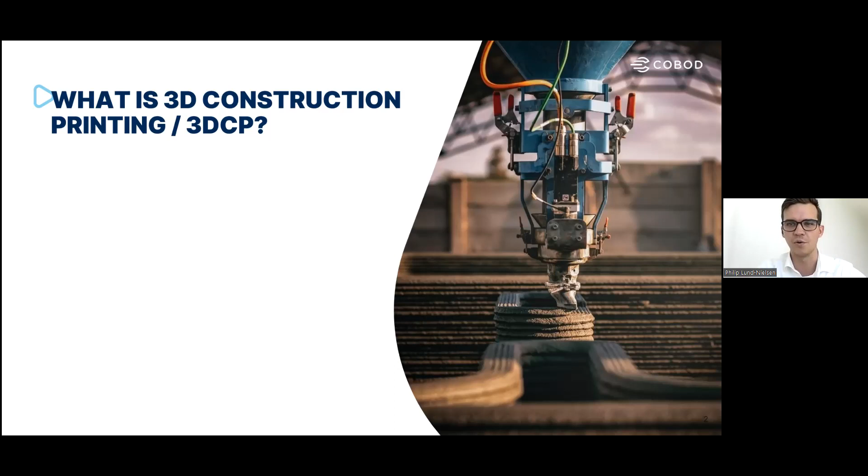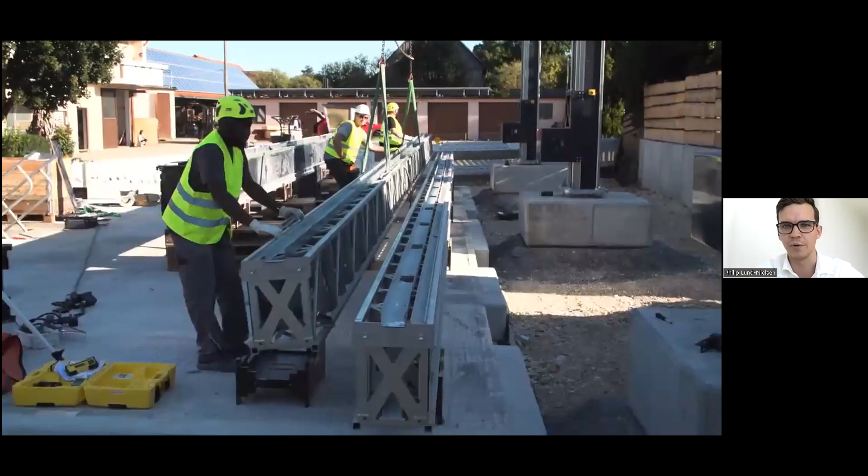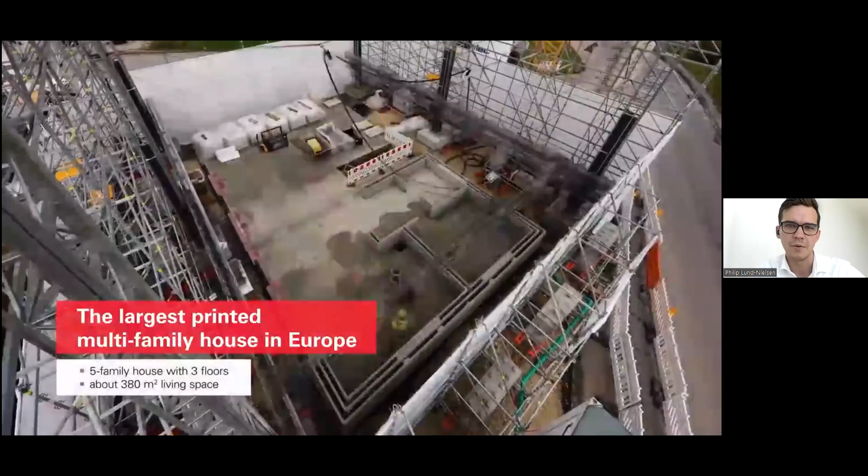3D printing in general is a way of automating the construction of buildings and other structures using concrete. You can see here the layers being extruded of this concrete, which will give you the final structure. Even better than a photo is a video, so let me go ahead and play a short video here. It might be a bit choppy since we're doing this online, but in essence this is a 3-story building that was 3D printed by our investor PERI Group in Germany. You can see these guys looking at the 3D file, which then comes to life using this machine extruding the concrete.

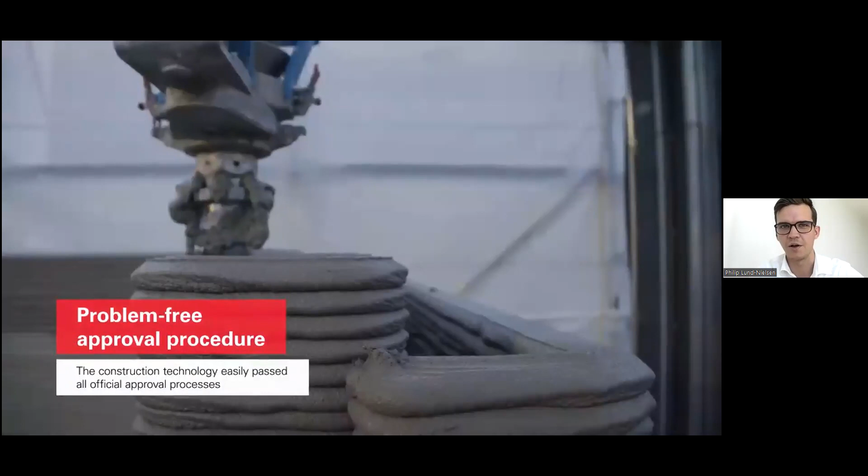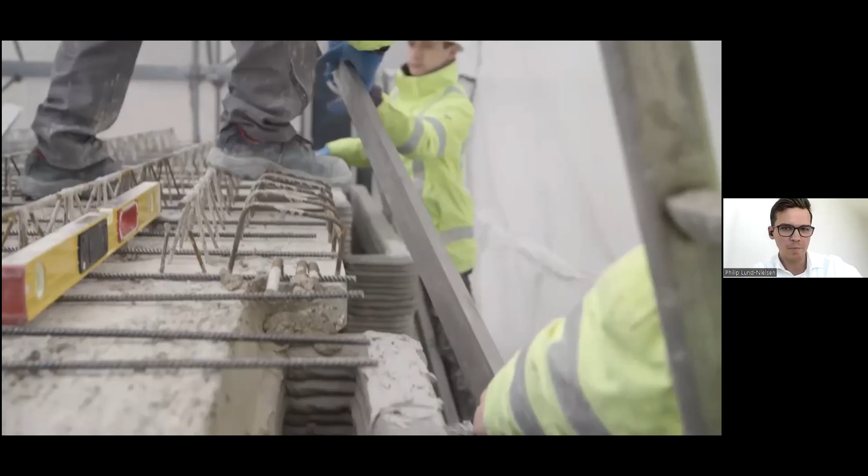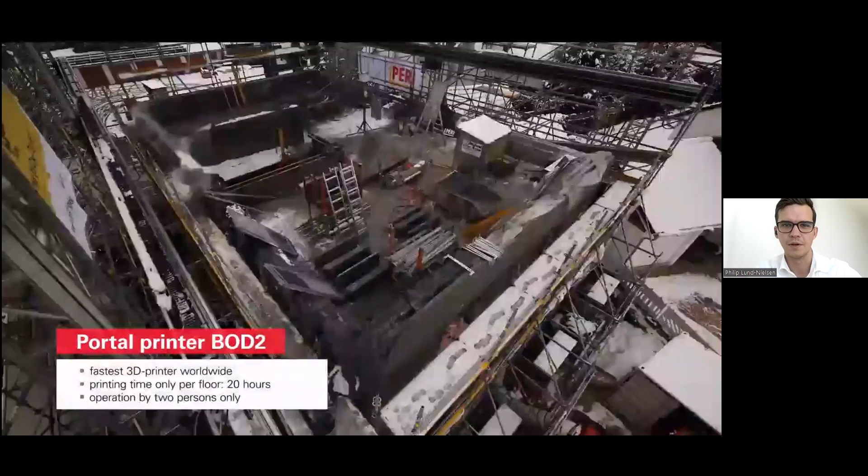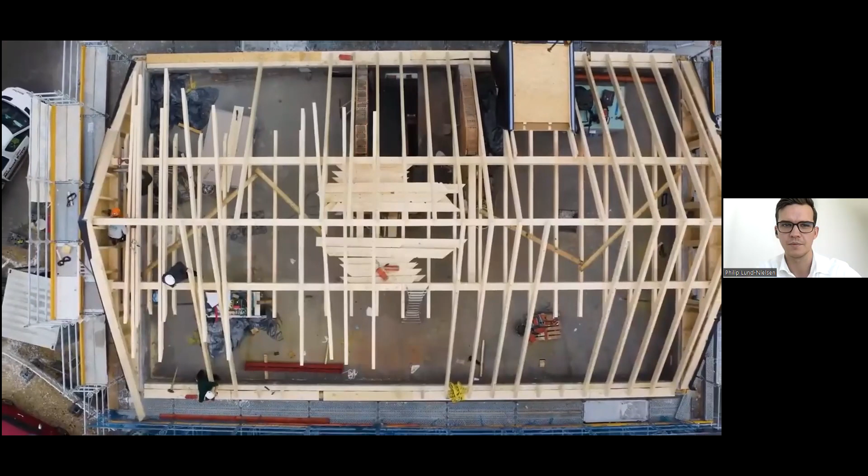This building here is around 4,000 square feet. You can see how the other contractors, through the electrician, come in and work in unison with the printer. This is the second story of the building. They're finishing up, the printer is finishing up, and then the third story. The roof is then put in via conventional method, by our investor and client PERI Group in Germany. So really a fantastic project.

After that, we can take the Q&A. So let me just jump right into a quick intro about COBOD.

We are the world's largest manufacturer of 3D printers for the construction industry. We have 3 regional offices. Myself, I'm from Copenhagen, Denmark. We have our offices in Miami, Florida - I just flew in yesterday, actually, so that's where I live with my team. We opened an office in Malaysia last year to cover Asia Pacific, and we plan to open an office in Dubai in the coming year to cover the Middle East and Africa. We've had almost 100 employees, so we're growing quite rapidly.

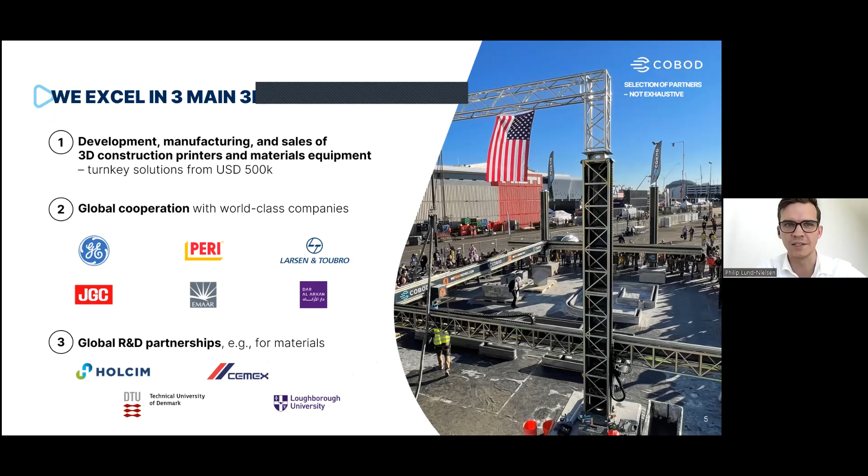Moving on, COBOD does 3 things in general. Number 1, we develop, manufacture, and sell these 3D construction printers worldwide, starting from around $500,000 per system, such as the one you see there to the right, which was in Las Vegas last year. Now, we're not a construction company ourselves, so we sell the technology and our clients actually do all the projects. We only supply the printers, not the project execution.

Secondly, we cooperate with these companies in bringing these projects to life, so there's a lot of support around actually getting these projects executed. We do that with, for instance, GE, PERI Group, Larsen & Toubro, which is India's 7th largest company, et cetera. And lastly, there's a lot of R&D that we do, both within materials and within the design and structure of 3D construction printing, which is somewhat different from conventional building. We do this with the largest cement and concrete companies in the world, such as Holcim and Cemex, and also a lot with universities.

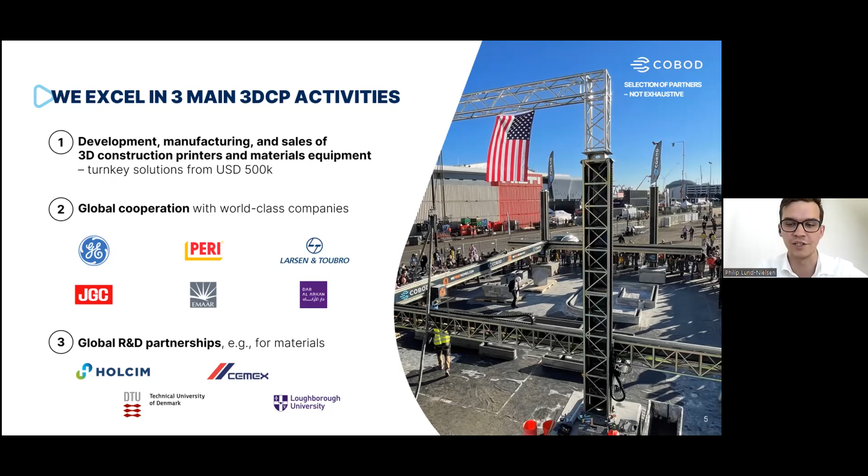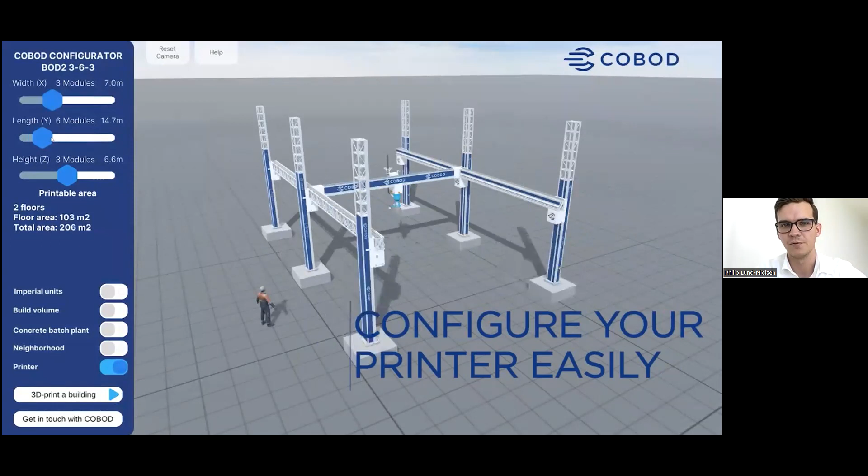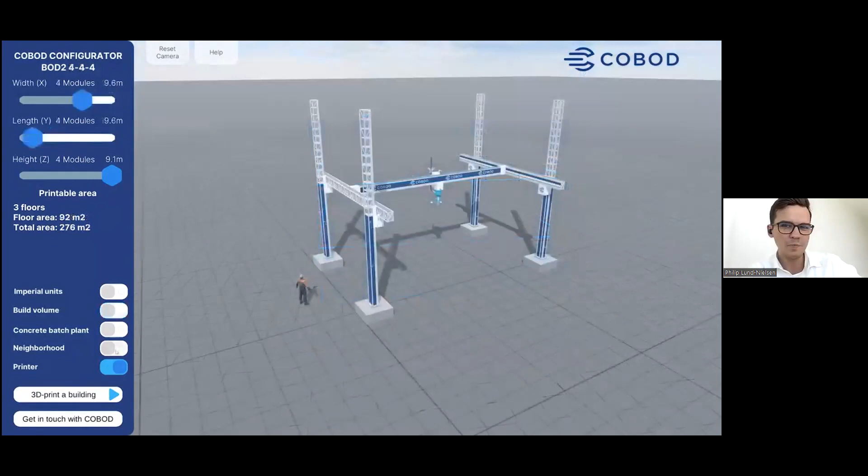We can also simulate projects that our clients have done, which means we can take a project from the digital world, as you see here, to the physical world that you can actually live in. And if you thought this looked cool or want to try it out, you can go to our website and play around with this. It's a lot of fun.

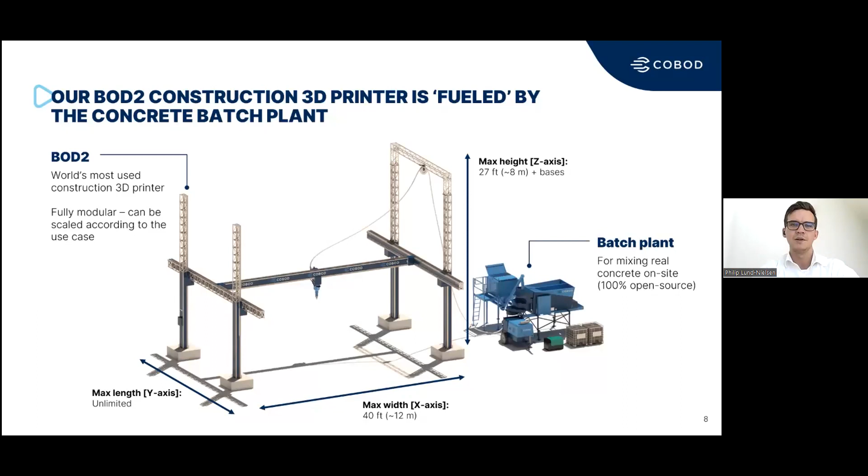From anything, from when we 3D printed the first home in Europe in 2017, a small 500 square feet home, to 2-story buildings, 3-story buildings, schools in Africa, buildings in the US, office buildings, urban furniture, and I could go on. There are a lot of different use cases for this technology, and it's only growing.

So we saw a lot happening in 2022. I need to actually update this list, and we will see even more so in 2023 moving forward.

If we deep dive on a few of them, we can start off here with a home that's now almost 4 years old. It was done in Belgium, 1,000 square feet, done in 2 floors and 3D printed in just 21 days, which for a first project is quite decent, especially given it was in 2019.

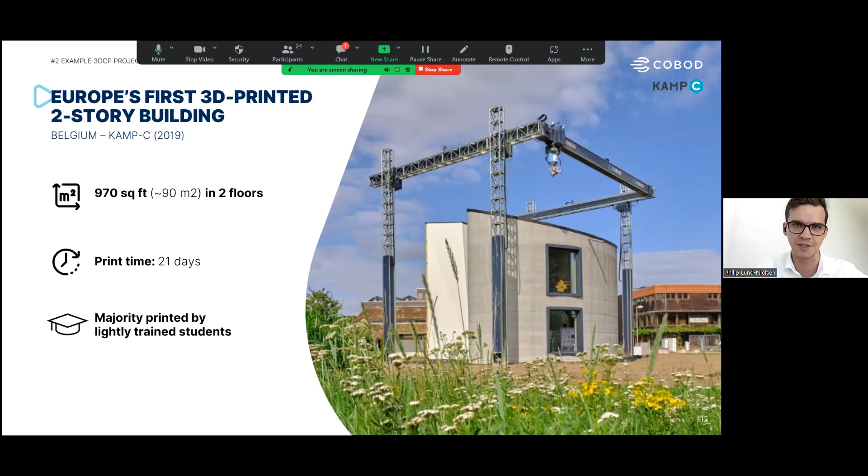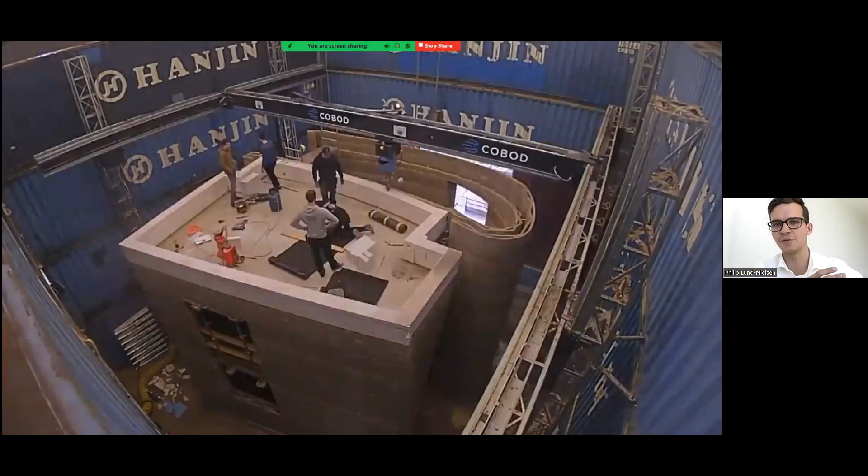Let's just have a look at how that looked. You can see here the machine does more or less all the work related to the raw house structure. Then afterwards, once the machine is done, you have the other contractors come in and finish the non-3D printed parts, such as the windows, the roof, the floors, kitchen, et cetera.

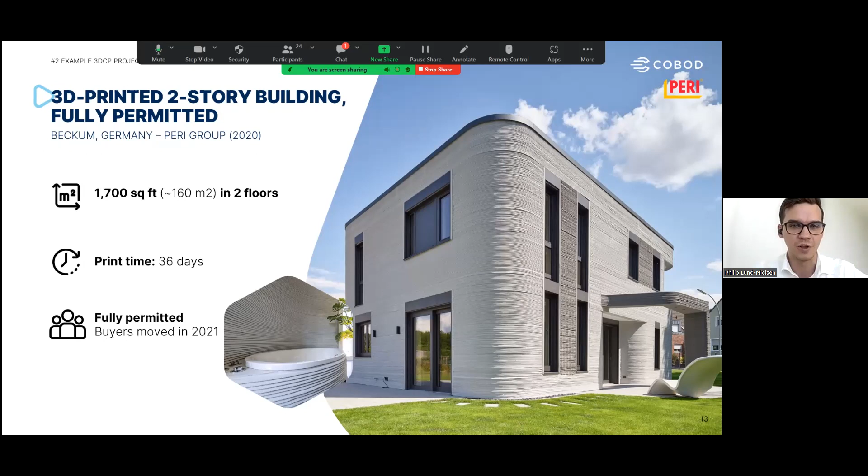We've also seen kitchen islands being 3D printed. And the cool thing is you actually have a family living in this building. It's not just a demo unit, and this applies to a lot of these buildings that you'll see here in my presentation today.

I see we have some comments in the chat. Fascinated, the design is amazing. I want this. Thanks a lot, guys.

If we move on, I had to show you one also from my home country of Denmark. This was a student housing unit with fancy Scandinavian design, 1.5 floors, and it took them around a month to print. They now plan to do an additional 20 of these for the local students in that small town of Denmark. So that's quite neat as well.

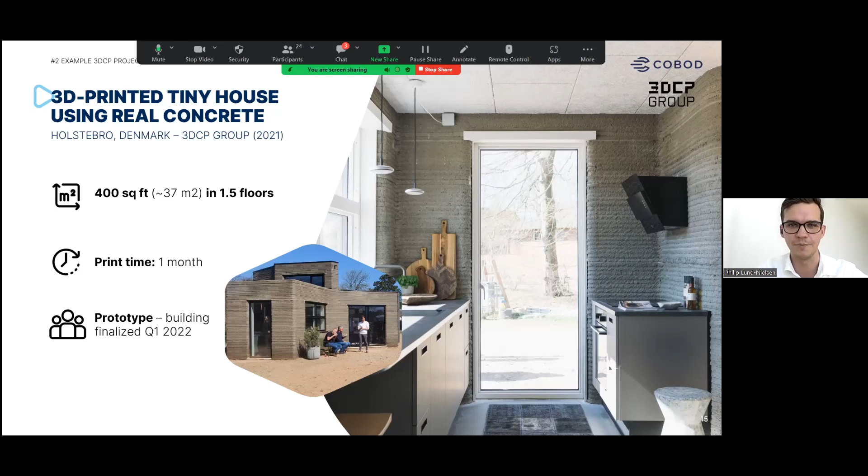Here's one a bit closer to us. This one is in Ontario, Canada, and that's the world's largest building that was 3D printed using real concrete, 2,300 square feet. In Canada, it's a multiplex with 4 units, I believe.

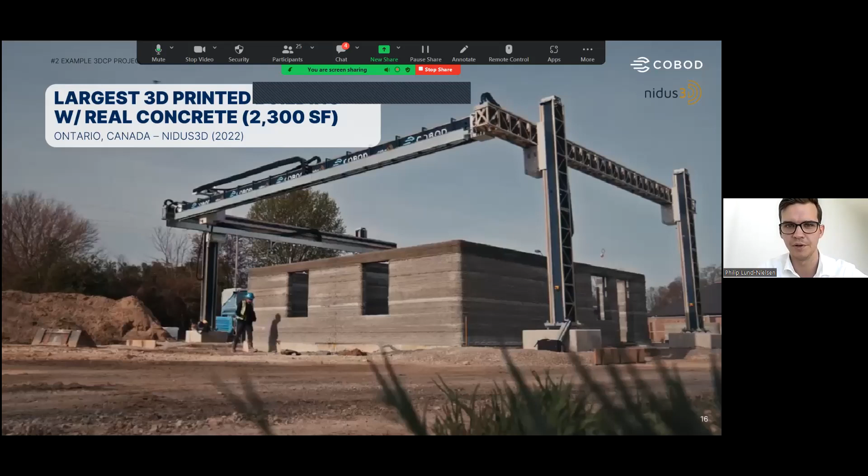And then another one that we're very proud of, also by our client PERI, a 2-story building in Houston, the first 2-story building 3D printed in the States, and it's going to be larger than 4,000 square feet. And they did a short video, so let's just have a look.

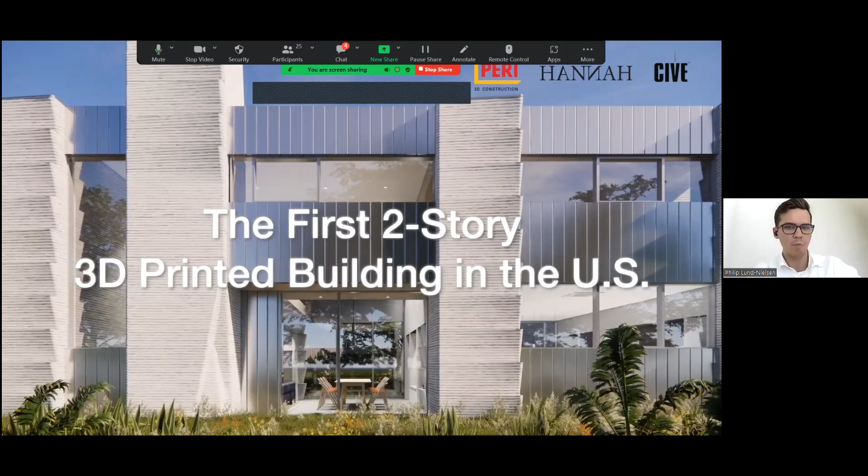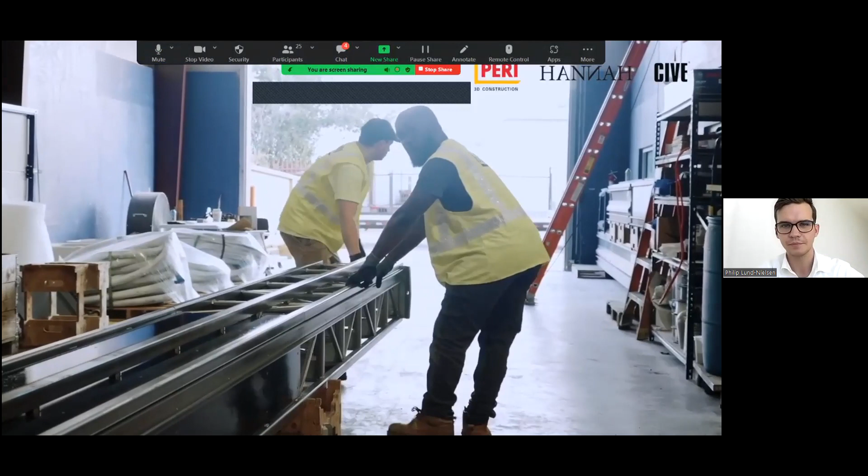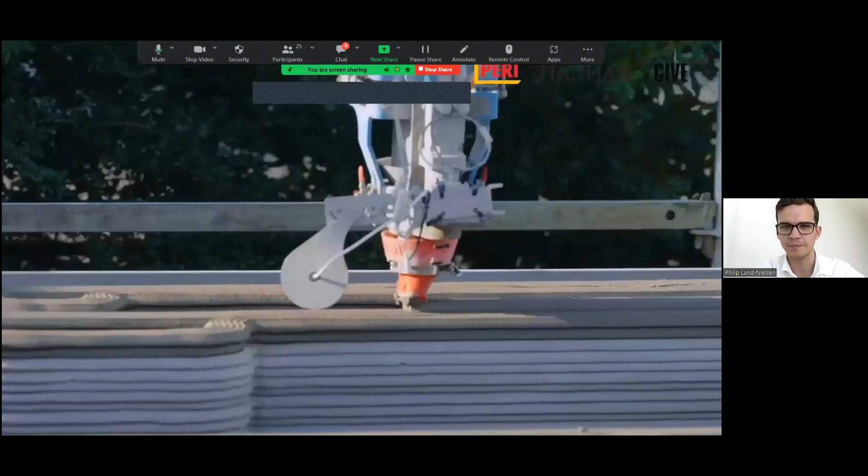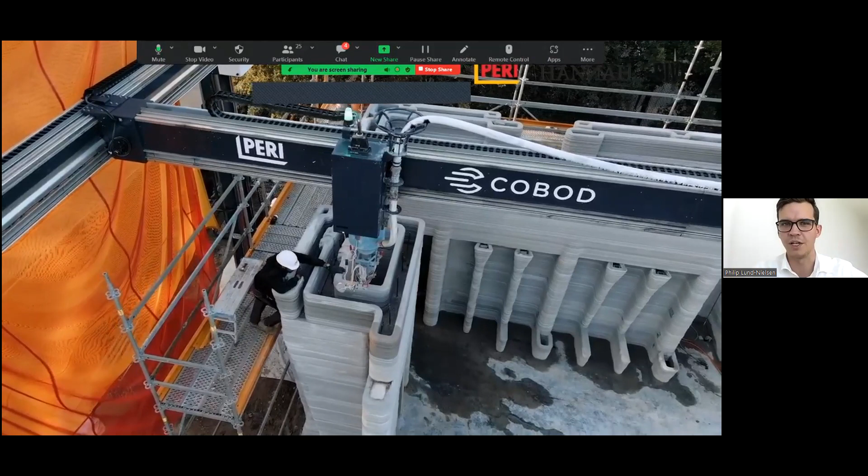And installing the printer, which is also a good sized piece of equipment. The concrete gets extruded. And you can see here how the technology really allows for doing designs that would otherwise be way too complex and too costly to do with conventional construction methods.

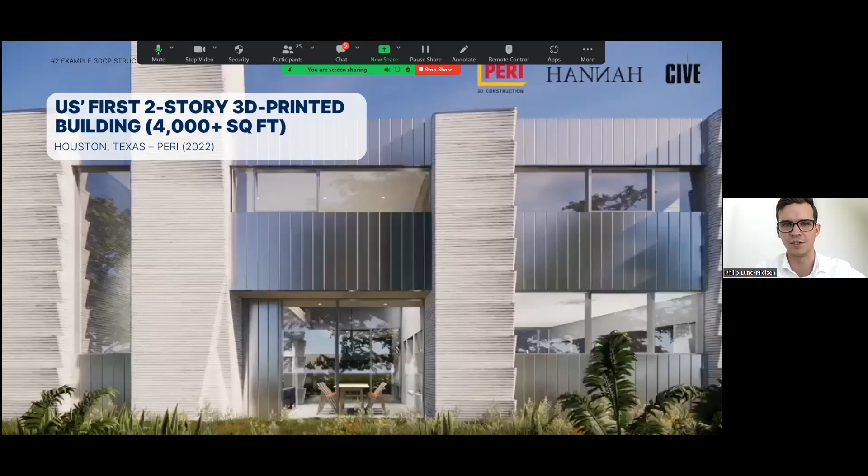And these are the partners that are involved in this project by PERI Group. Quite nice use of the technology, and really once they're done in a few months with the 3D printing, I think it's going to be one of those historical moments almost of this technology.

You can also use it for other types of structures. So here we have some urban furniture 3D printed by our client in Guatemala called Progreso. It's a bench for, I think, a bus stop, and it just looks really neat with the combination of the light here and the concrete.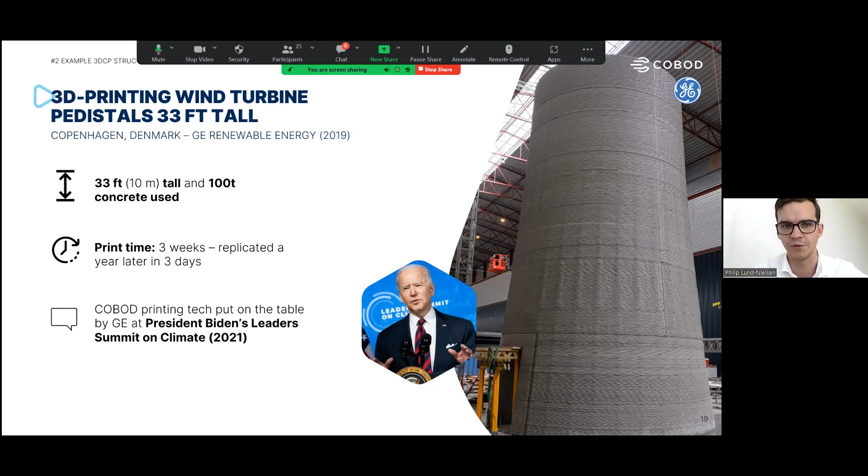I'm just going to skip the video here due to time considerations. So those were some example 3D printed structures, and I hope that gave you an idea as to how this technology can be used to do construction in new ways.

Besides it just looking awesome, I also wanted to talk about the benefits of this new technology. We see 4 main benefits of 3D construction printing: number 1 is automation, number 2 is speed, number 3 is material efficiency or sustainability, and number 4 is added design freedom. Today I want to deep dive on numbers 1, 2, and 3.

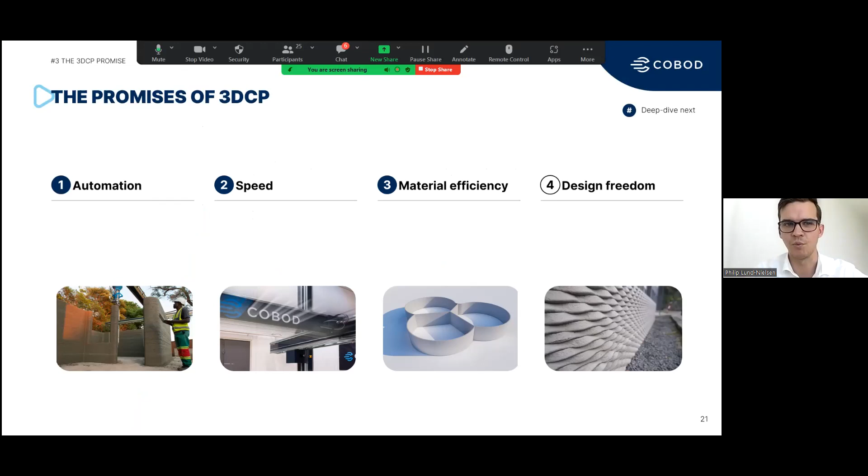Starting with automation: in essence, you reduce labor cost by having less labor on site, which is especially hard to get these days due to a lack of skilled labor. In addition, you increase quality, precision, and safety by having the machine do the work. So let's talk a bit more about automation.

If we look at the US housing market right now, you're all aware it's not looking too bright. There's around a 4 million home housing shortage in the States. Housing prices have increased drastically post-COVID, 30 to 40% by the records I could find, and the average construction time has almost doubled, from 4 to 6 months to 8 months plus post-COVID.

That's why we want to introduce this technology, to really address these issues. Automation is truly needed in construction and the housing market. Construction is the world's largest industry, yet it's one of the least automated industries as well.

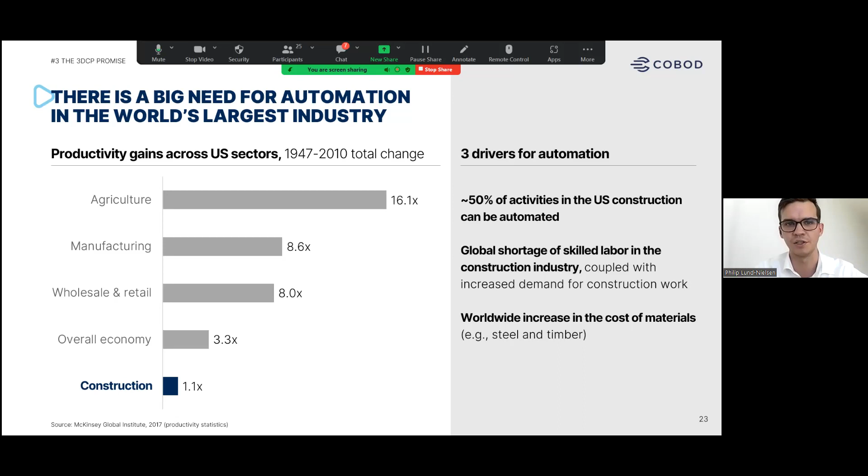While we haven't looked into those numbers ourselves, we've started to hear anecdotes that costs are actually coming down, and I see this only improving in the future. Remember, we only sold the first machine in 2019 — imagine where we'll be 10 years from now. It's really looking bright moving forward.

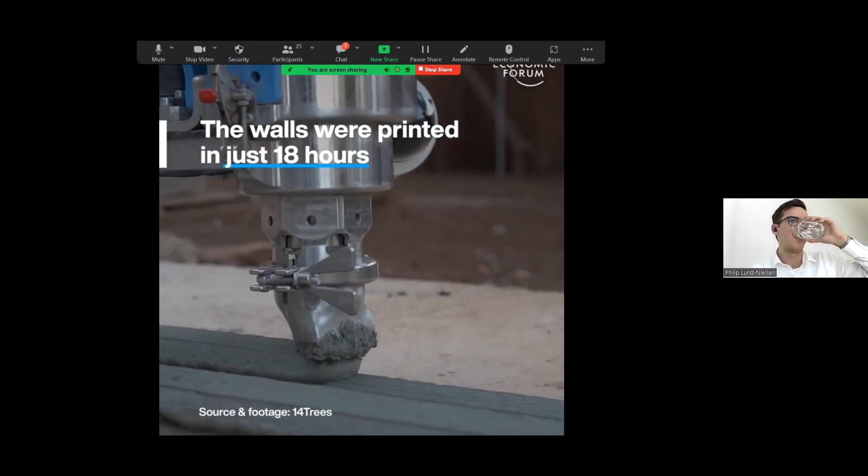Another example of reduced cost is this 3D printed school done in Malawi, Africa, by our investor Holcim. It was covered by the World Economic Forum. They claimed a 50% smaller carbon footprint, and they 3D printed it in only 18 hours, with both an indoor and outdoor classroom.

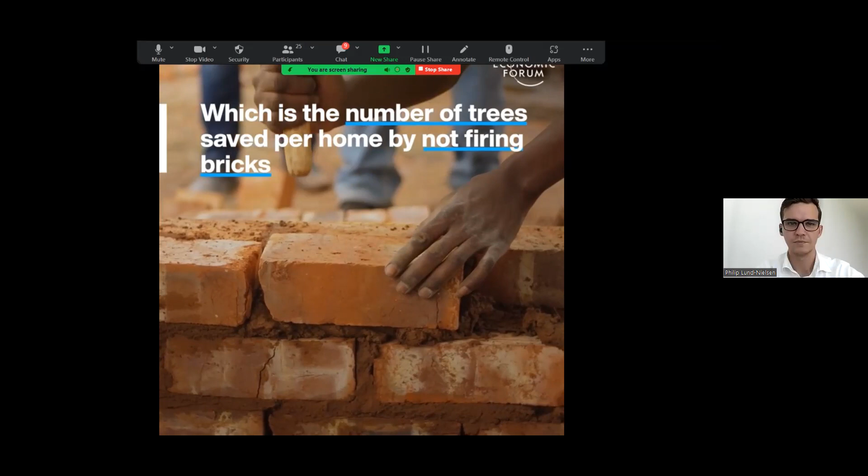They've now started a very large-scale project with 50 homes in Kenya, Africa as well. So we're going to see more and more of these projects popping up.

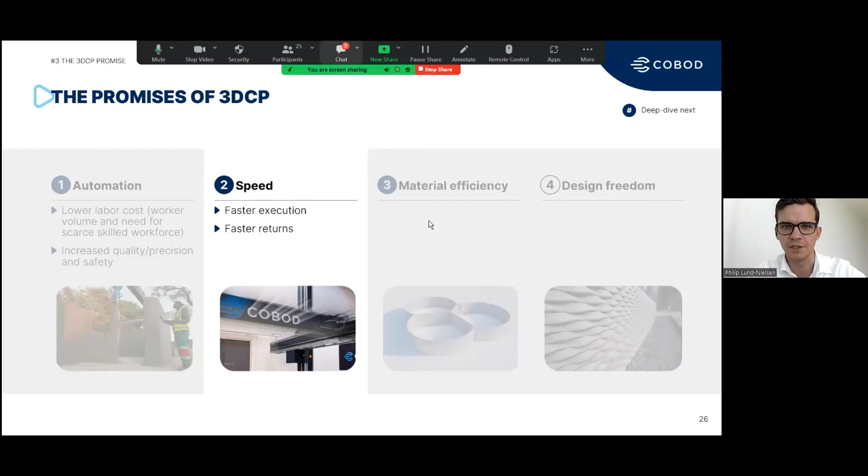Let me just check the chat here to see if there are any questions. We have a lot of questions, Philip. I was actually going to wait until the end to go through the questions, unless you want to stop right now and answer them.

Let's take it at the Q&A, and then if there are any follow-ups, I can take them right away. Okay, because Della and I are collecting them, so just to make sure we get them all. Cool, sure. Okay, thanks. You want me to start, Dawn?

So one of the questions was, are these types of structures approved in all 50 states? I know you're on the manufacturing end instead of the building end, but do you know if they have structural approval? Actually, if it suits you guys, let's do the questions at the end, at the Q&A, and I'd be happy to speak more about permitting and all the rest. That's good, okay awesome. But we can for sure speak to that.

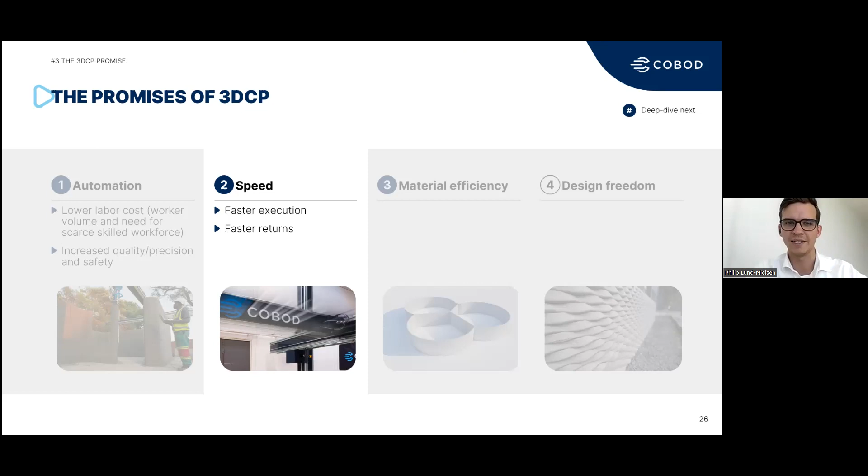So the second benefit of 3D construction printing is speed, being able to do homes faster. Faster execution means faster, bigger returns. As an example, we have one here of COBOD doing the same 3D printed building twice.

We built the first 3D printed building in Europe back in 2017, around 500 square feet, and it took 2 months to print. For 3D printing a new building, this had never been done before on that continent, so we thought that was fairly okay. But 2 years later, we replicated the same building using the same 3D file, and we went from 2 months down to just 3 days. That's a productivity improvement of a factor of 20.

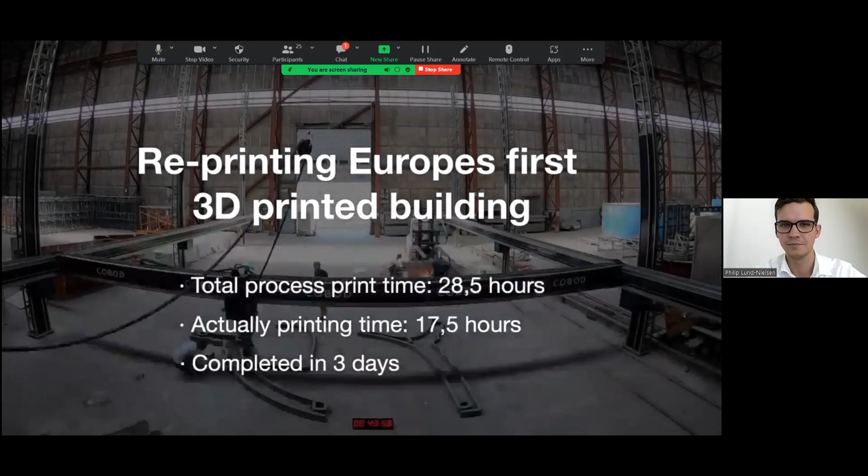You can have a look here how it looked the second time we did it. Everything is documented - that's why we had the clock there in the front, because we want to be very transparent about the claims that we make.

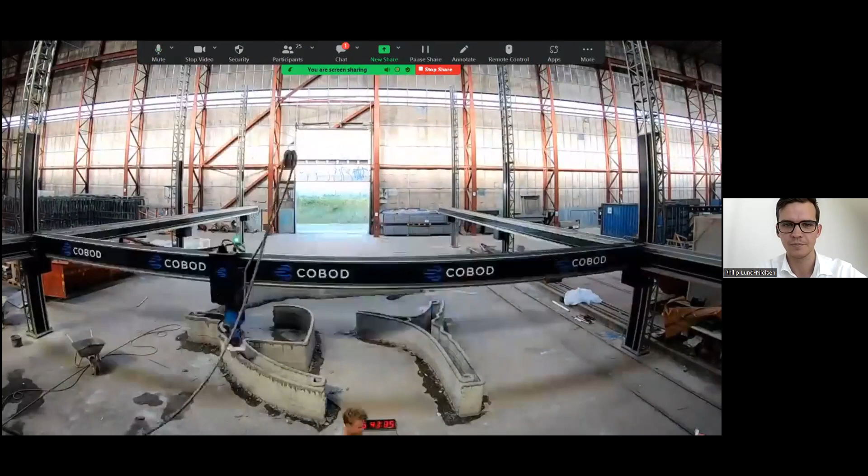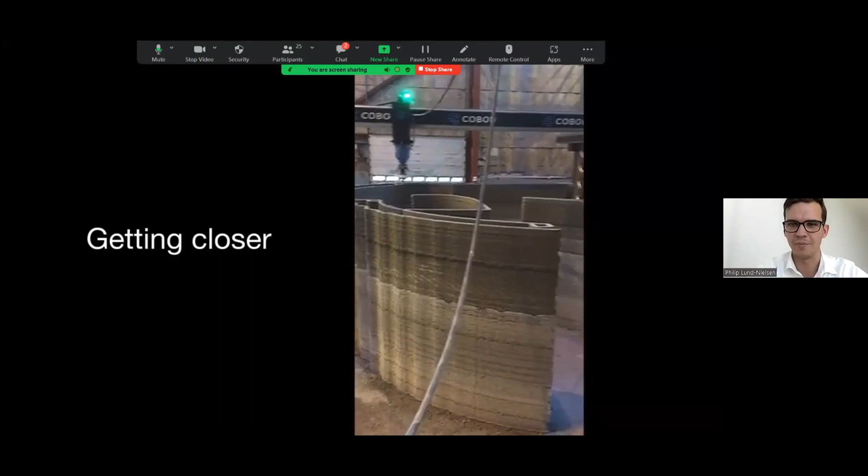In this video you can also see over how many days the building was 3D printed. A telltale of that is the color changes - the bottom half has a lighter color, which is the first day where the concrete is cured, and on top that's the fresh concrete being extruded there in the back.

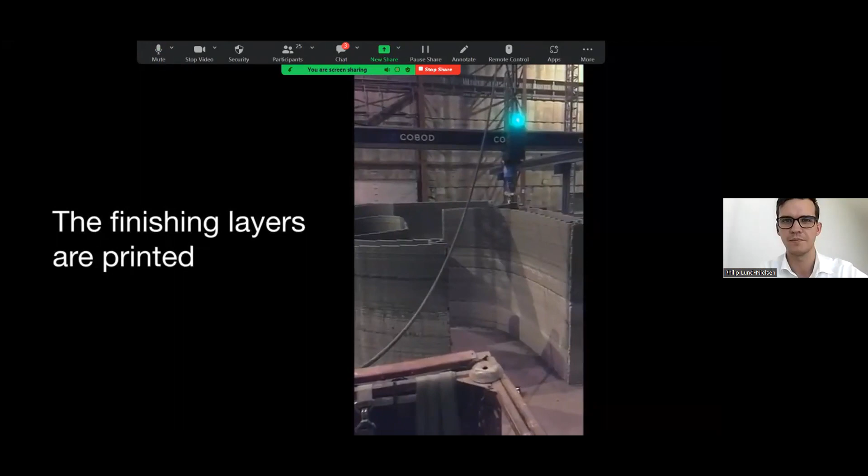Here from the top, with some more stats - this was a productivity improvement of around 20x. We see this all the time with our clients, that the learning curve is so steep that from the first project to the second to the third, they improve drastically, both with regards to speed and material waste, which gets reduced by a lot. It looks better too. I think in 5 to 10 years, this will be a major competitive technology to conventional methods, and it already is today by the anecdotes we hear - it'll only improve from here.

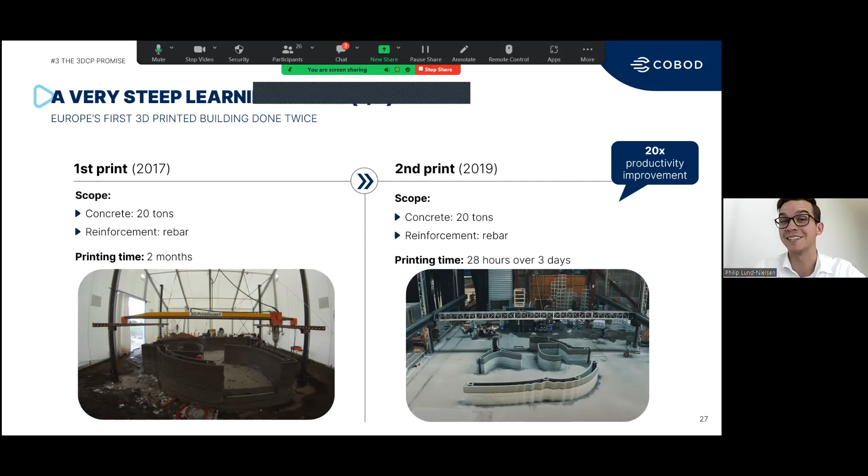It's really fascinating to see what our partners accomplish using 3D print technology. So speed was benefit number 2. The last benefit I wanted to talk about was material efficiency - reducing waste by only 3D printing what you need, and secondly, having the possibility to use new and greener kinds of materials.

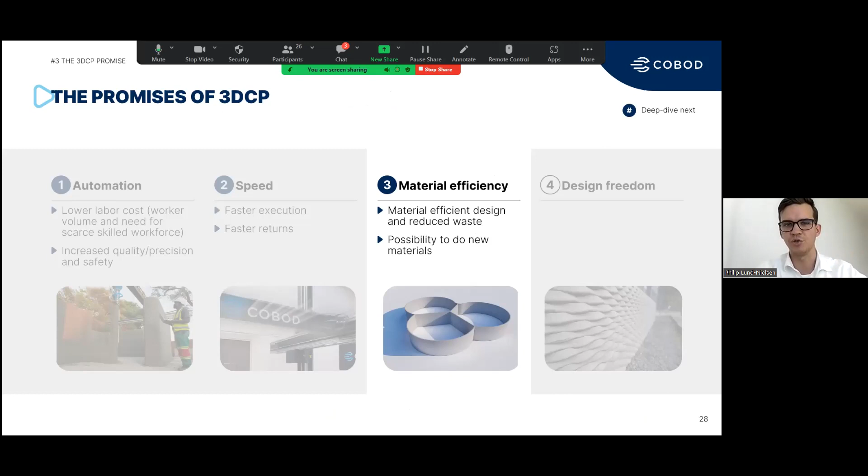One thing I find particularly fascinating is reducing the amount of material used by optimizing the structure. As an example, we have 2 classroom designs our client wanted renderings of. One is a modern design with 3 rounded classrooms, which is unconventional compared to the bottom one, which is exactly conventional - 3 rectangles next to each other, a room we've all been in before.

If you look at the stats, the floor area is the same across the 2 designs, 2,200 square feet. But the material usage of the modern design is actually 10% less, simply because a rounded shape is more efficient than a rectangle. So that's 10% less material just by doing a different design.

In addition, I find the modern design more aesthetically pleasing, and honestly it's better suited for learning because of acoustics. Everybody faces the teacher at the middle of the room, similar to an old Greek auditorium or theater, where people would face inwards with the actors at the bottom.

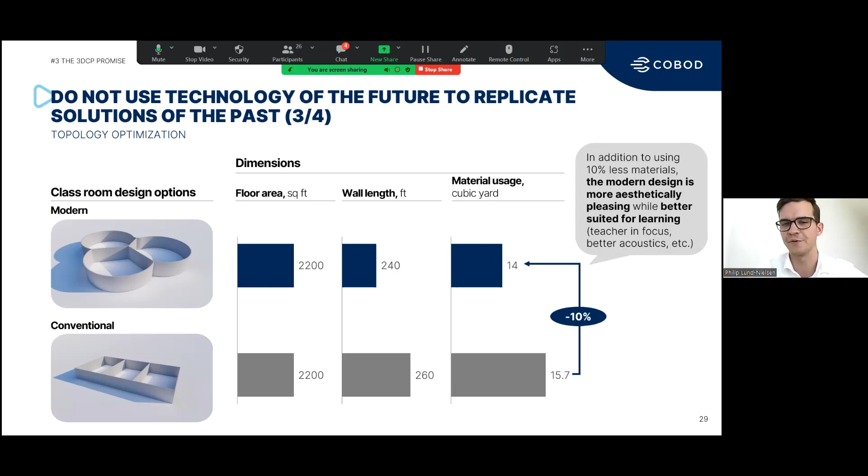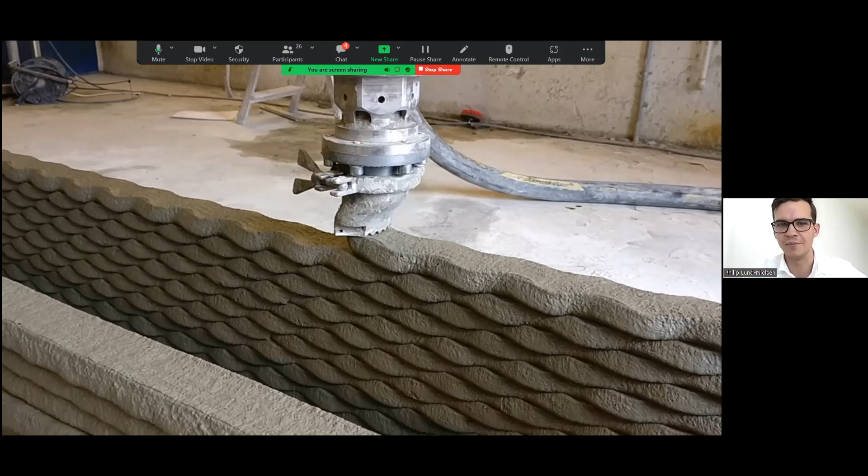Lastly, I said I wouldn't talk about it, but just a bonus round here. The design freedom you get from 3D construction printing is out of this world. It allows you to do designs that you would have otherwise never done, such as the 3D printed wave pattern you have here. Or you could even do a logo where you imprint, in this case, the COBOD logo right into the walls themselves, which would be at the same cost as doing these walls in a straight line.

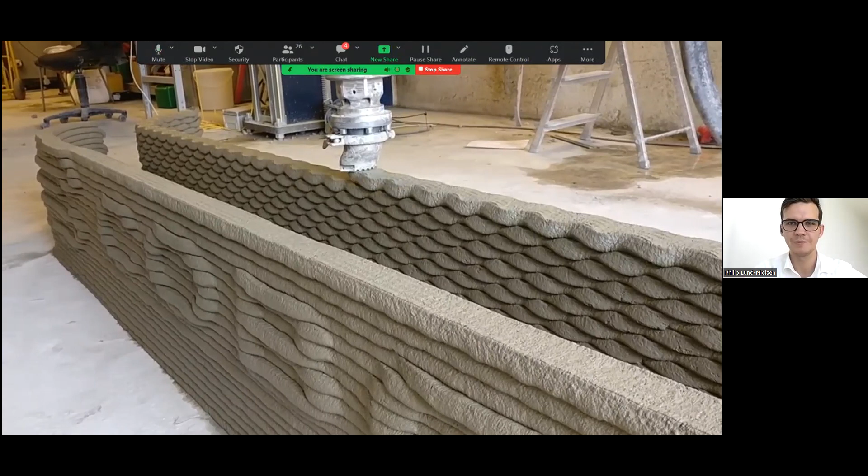Let's just have a look one more time. Really, really pleasing to the eye. So those are the 4 benefits that we see of 3D construction printing: automation, speed, material efficiency or sustainability, and 4, design freedom.

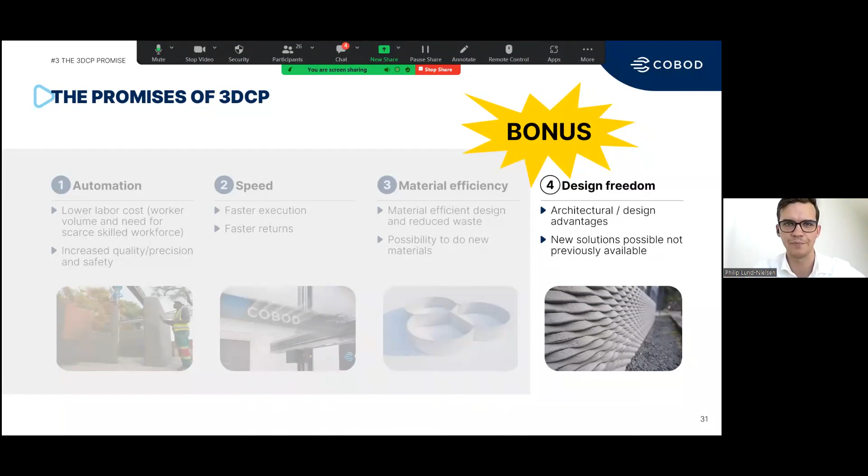Here, I wanted to talk about what are some steps of a 3D construction print project. I will not go through all of them, but just give you a high-level introduction and answer some of the most common questions we get within this area.

High level, you would need around 4 people on the 3D construction site. First, you have a print operator, that person is all the way at the top, overlooking the print area. Secondly, you would have a materials expert standing next to the concrete batch plant, which you see there in the middle, outlined in blue.

Third, you would have a materials helper. This person is refilling concrete, or the components of concrete—sand, cement, and gravel—into the silos, which is then mixed together to create concrete on site. And fourthly, you might have a visual inspector or helper simply to walk around and ensure the walls are coming out as intended in the 3D file.

So this is a typical overview, and you would reach around 3 or 4 on site within a few projects. Initially, you might need a few more as you get accustomed to the tech.

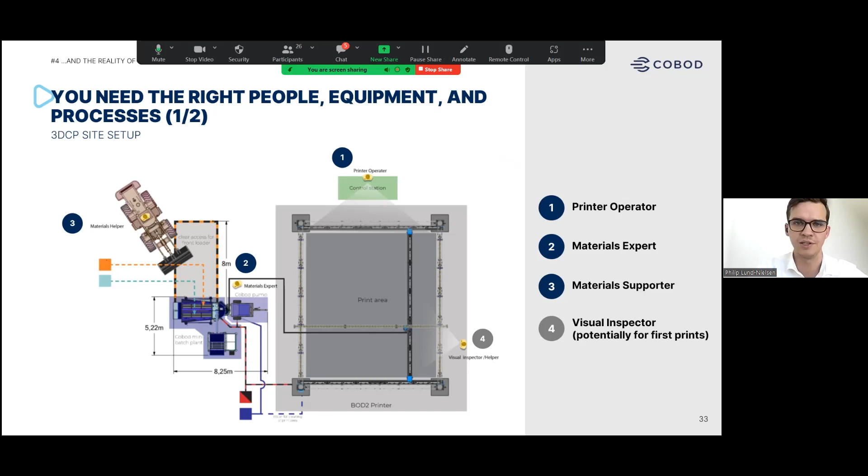We see 7 main steps of a 3D construction site. You have 3 groups: the initial manual work, 3D printing, and finishing. So step 1 is excavating the ground. Step 2, installing the BOD2 3D printer.

Then the fun starts with step 3, which is printing the top foundation of the slab. Then step 4, printing the walls. Step 5, completing any horizontal work. This could, for instance, be 3D printing the roof or 3D printing the slabs for each floor.

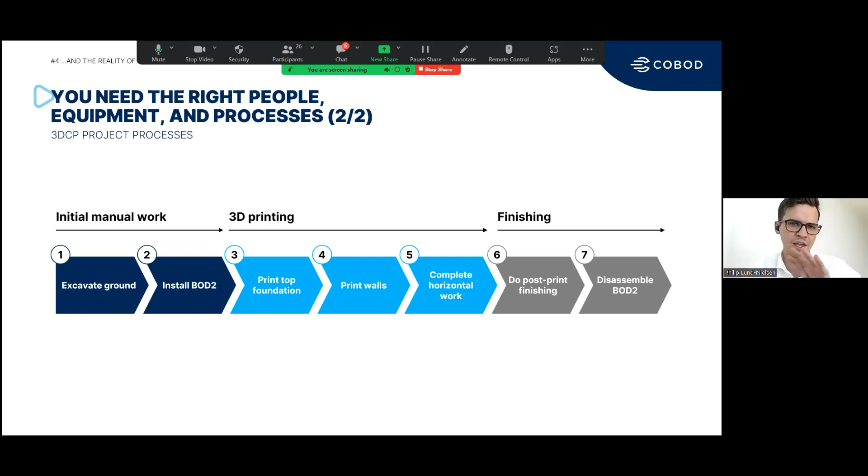And then lastly, finishing, step 6, post-print finishing. It might be that you want to trowel the walls to do smooth walls, adding insulation, MEP in general, and then disassembling the BOD2 and moving it to the next construction site. If we just deep dive here on the middle part of the 3D printing process—

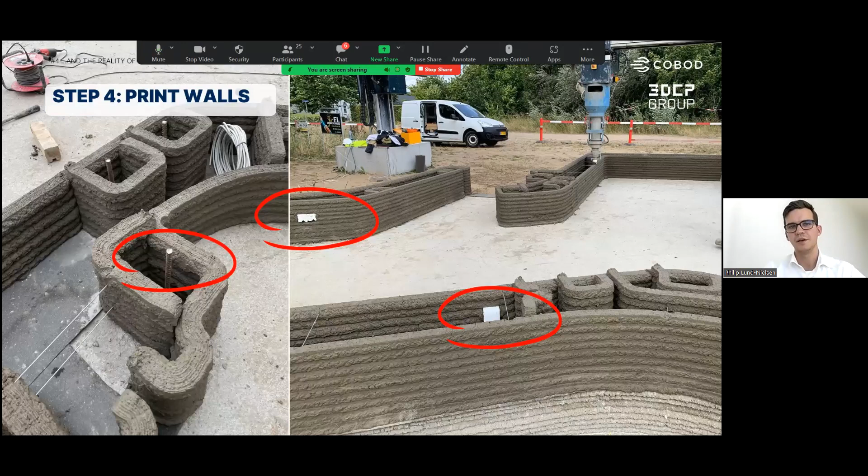The question we get often is how we do reinforcement, and this is also related to the permitting question we had before. If you look to the left, what we do is around the interior or exterior walls, we 3D print these columns. Once the columns are finished, you stick down the rebar, the steel, and then backfill with regular concrete. Those become your load-bearing elements of the structure. So typically that's how you get the permitting done, not through the 3D printed walls—they're more, you could say, ornamental, despite being very, very strong. What really gets permitted are those columns with regular concrete, backfilled and reinforced with steel here.

To the right, you can see how electrical sockets are done.

When you do the print, you simply stick in styrofoam cups or other types of cups that the printer then prints right on top of. Once the concrete is cured, you can pull them out, and the electrician can come in and run the conduit and everything else. This makes it easier for other contractors to do their work. You can see how an electrician can come in and run the conduit at knee height, which might be more difficult with conventional construction methods.

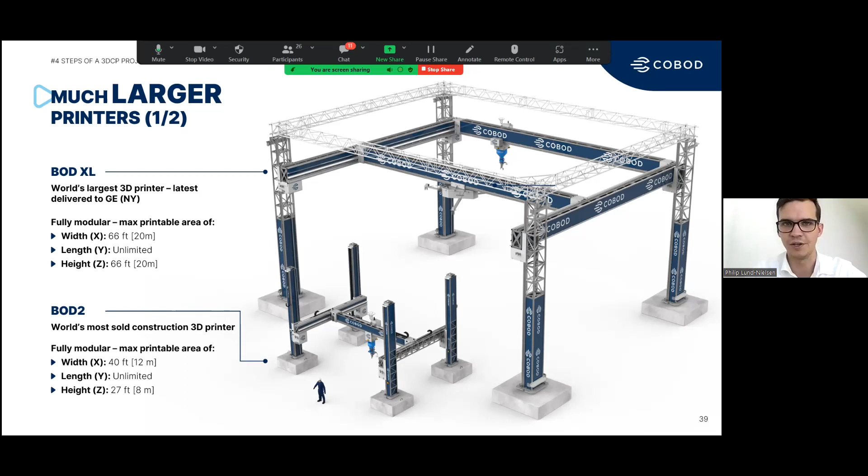Secondly, we're going to see much larger printers, and COBOD wants to be a driving force of this. The printer and projects you've seen so far used the BOD2, the small printer at the bottom, which is not small by any means - it's 30 feet tall and can print up to 3 stories. But the printer you see in the back, which we developed and delivered to General Electric, the largest in the world, can print up to almost 70 feet in height, around 6-story buildings. This will take construction 3D printing to the next level by allowing us to do more projects.

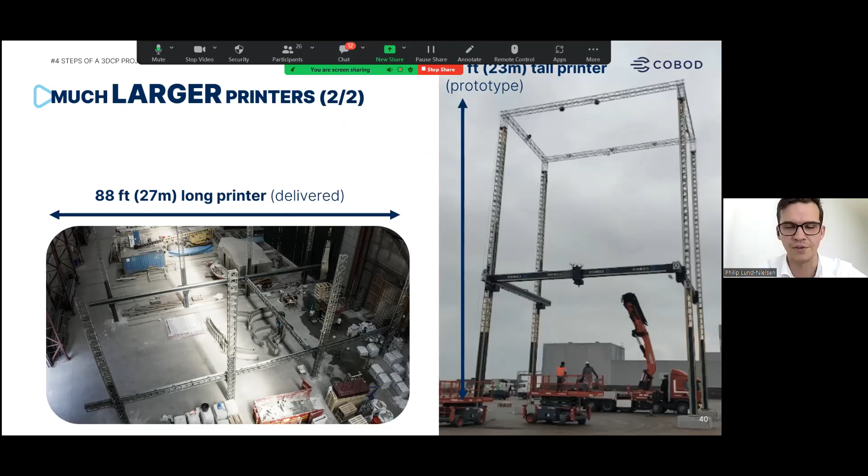Trend number 3 is that we're going to go from these machines being just 3D printers to becoming multifunctional construction robots, having more than one purpose. Right now what you've seen is the shell of the building being 3D printed, the raw house structure. But these machines, now that they're up there, could do even more - for instance, sanding down the walls, pouring insulation in between the walls to reduce cost, or having a spray gun attached to do spray painting of the walls. There are so many features we could develop and stick onto this type of equipment that have yet to be explored.

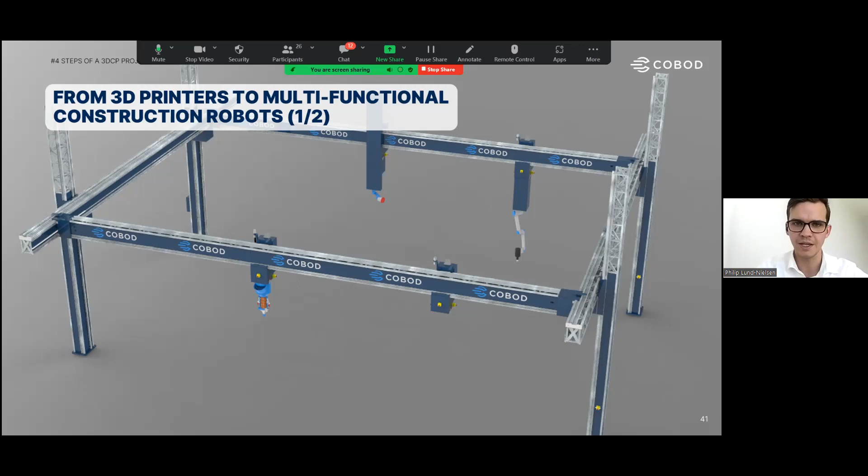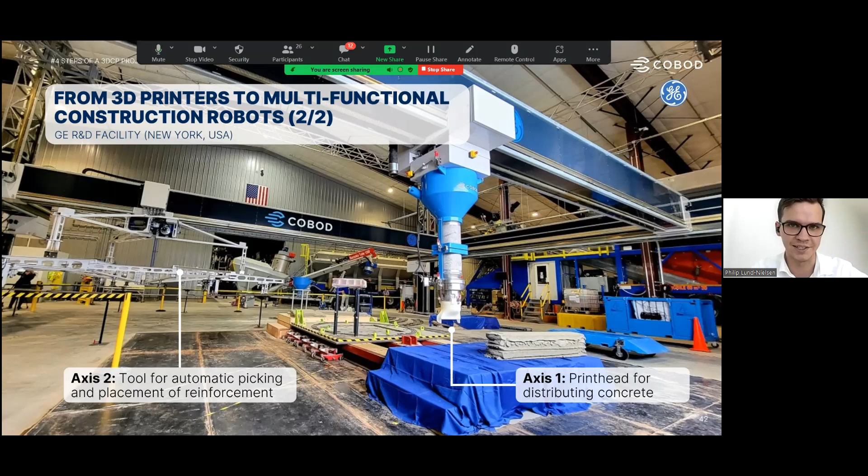This was the conclusion to my main presentation. Thanks again for listening in. I hope that this was an inspiration as to how 3D printing is transforming the housing industry. And now I'm happy to take any questions from the audience.

Wow, thank you so much, Philip. That was amazing. I want at least 3 of those houses in one of those buildings myself, especially the one that you call beautiful. It was really, really nice. So we have a few questions. Della, did you want to tag team on the questions, or did you want to just? We'll start at the top and we'll see how many we make it through.

Okay, so again, the conversation about this type of structure - I mean, you live in Miami, you know Florida's got special building codes. So how many states in the United States has this type of building process been approved?

It has only been approved actually in a few states on a statewide level. What typically happens instead, and I do believe that in a few years we will see more and more states approving of this kind of build method, but because it is very new, it's very typical that the technology is faster than regulation. Regulation typically trails new technology by a few years.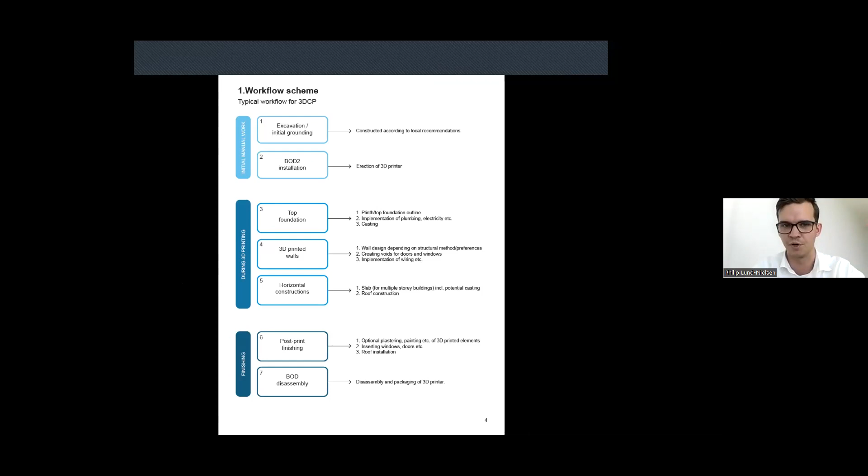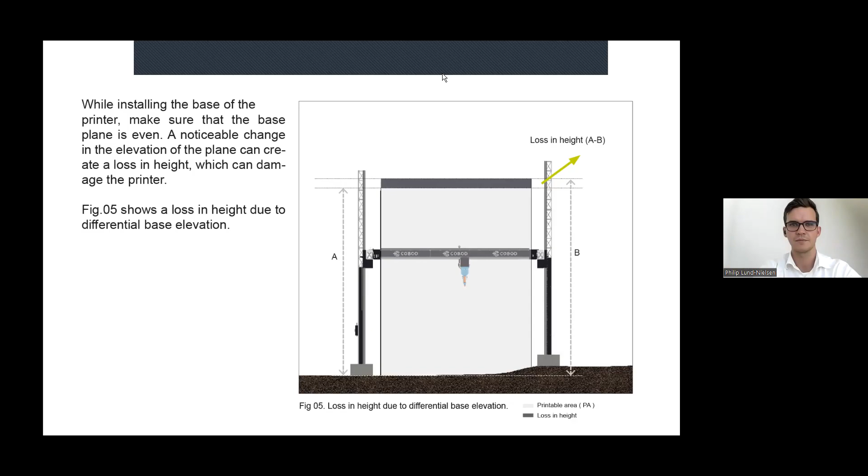Yeah. Do your global corporations and partners consult on projects? Yes, they do. So imagine, I'll give you an example here.

I hope I understand this question correctly. One of our clients in California, called Emergent 3D, has now finished around 4 homes, I believe. And it's very common that either they receive inquiries from local California residents interested in having buildings done, or by developers, or that we receive them and forward it to Emergent, who would then give input as to how that project could be accomplished.

Okay, very good. So where are the machines actually made? And how long does it take to manufacture them?

The machines are made in my hometown of Copenhagen, Denmark, by my skilled colleagues, and then they're shipped all around the globe. However, we are investigating potentially setting up manufacturing here in the States as well. It won't be this year, but down the line that could for sure be of interest.

The production of the machines right now, we aim to get that down back to around 4 months again. We've been hit a bit hard by supply chain issues, like any other industry, especially manufacturing.